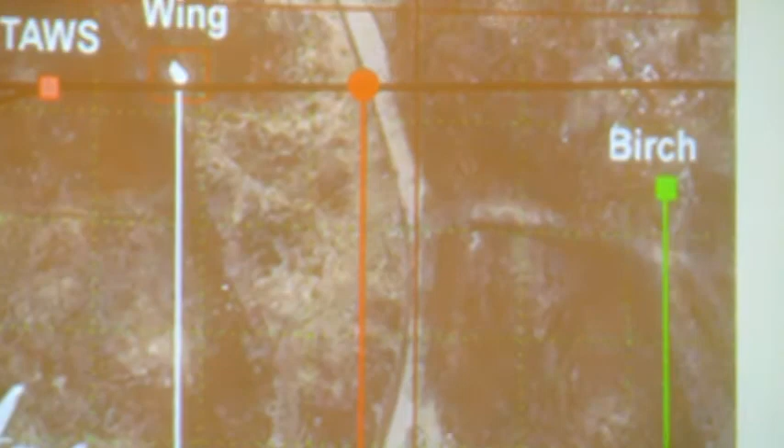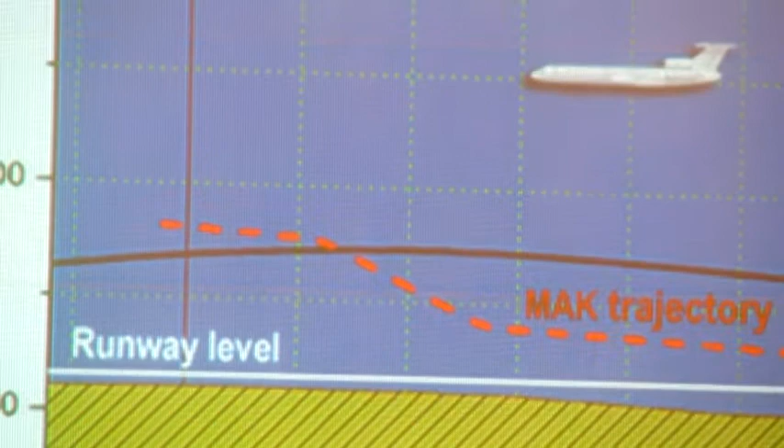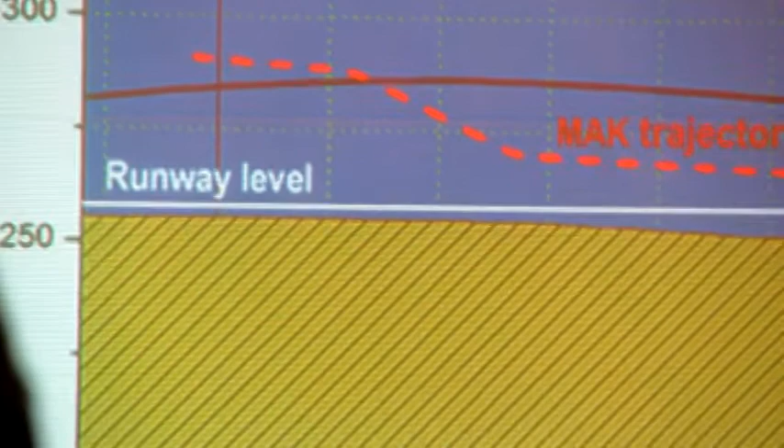According to the prediction of the investigating committee, the Russian investigating committee, the plane without a wing - you have to remember that they claim it lost one third of the wing at this point, so there was no wing on one side - was able to fly up, then a little bit horizontal, fly up again, and cross this black line, which was disregarded by this investigating committee for some reason.

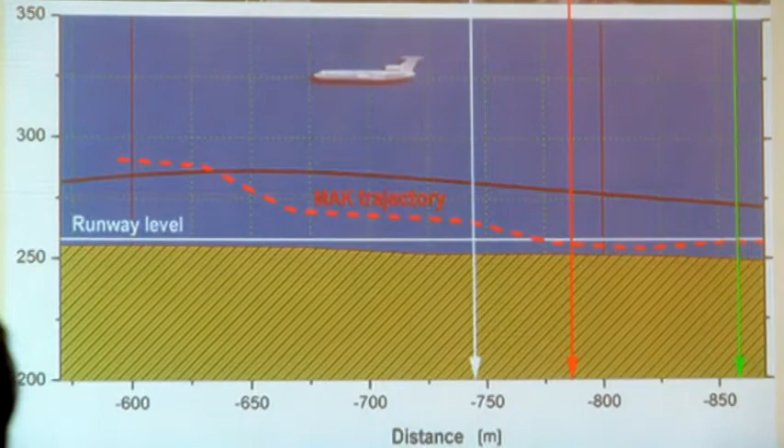That measured the real, in my opinion, elevation of this airplane. Now, this is the wing that was found 111 meters from the birch.

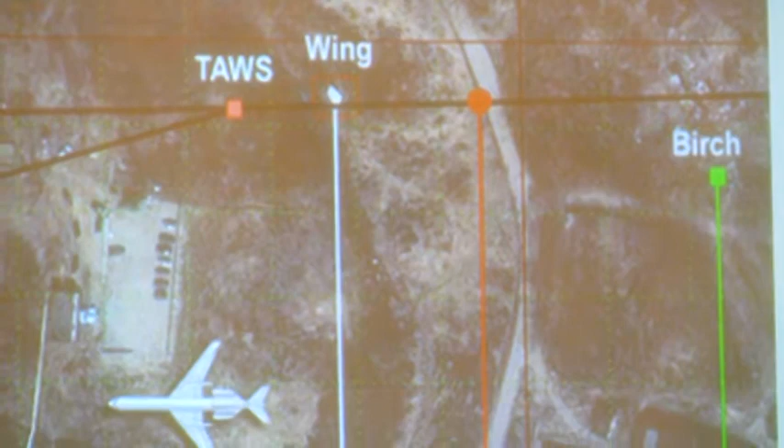So it means that - and you can see the green spot - in this area there's some forest, trees, and so this particular wing would have to fly through this forest, and somehow it didn't leave any marks. That again, in my opinion, made this assumption, this conclusion of the Russian investigating committee, not correct.

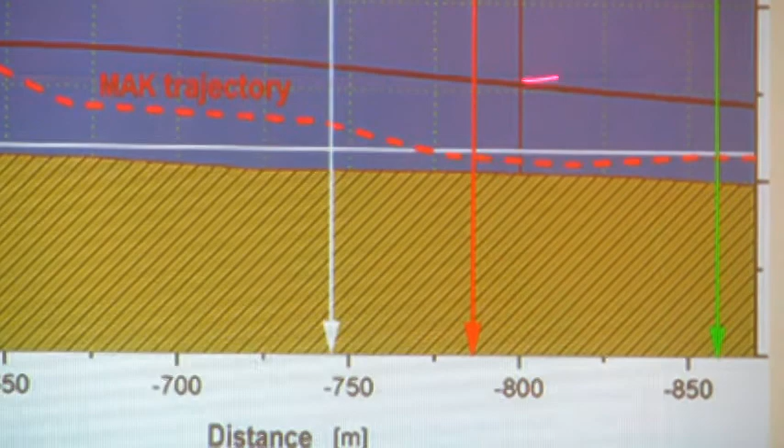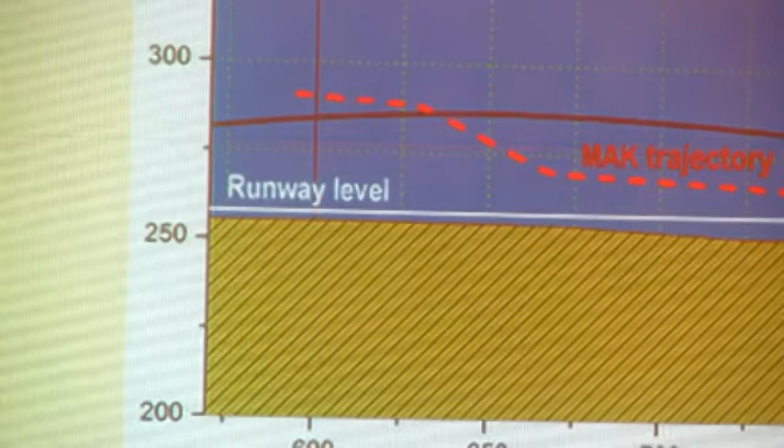In fact, the independent evaluation of the black boxes produced this curve, which means that the plane never hit the birch and flew over, but something happened in this area which drastically changed the orientation of the plane, and that was attributed by one of the experts from Australia to an explosion of the airplane, basically, in this location.

But my work was focused on simulation of the crash of the plane to the birch, because at that time I didn't know that other possibilities also exist. So I built the airplane model - well, I say I built it, but of course my graduate students did it.

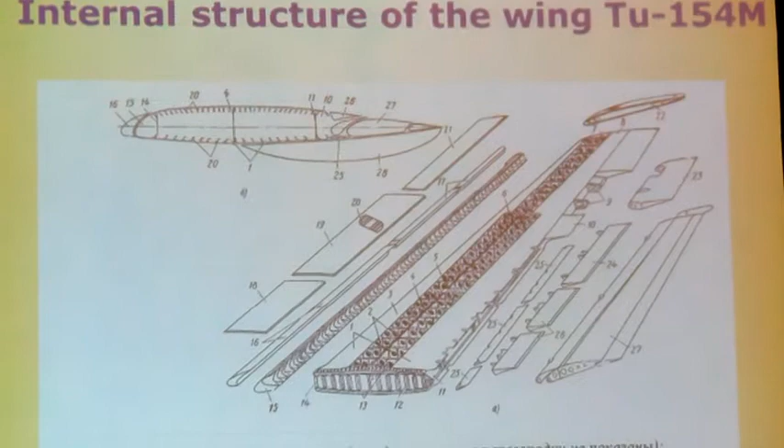With all utmost care to build the wing properly. Now, at the same time, we didn't want to make the wing too strong. So basically our wing is based on skin, the longitudinal beams, and those horizontal parts.

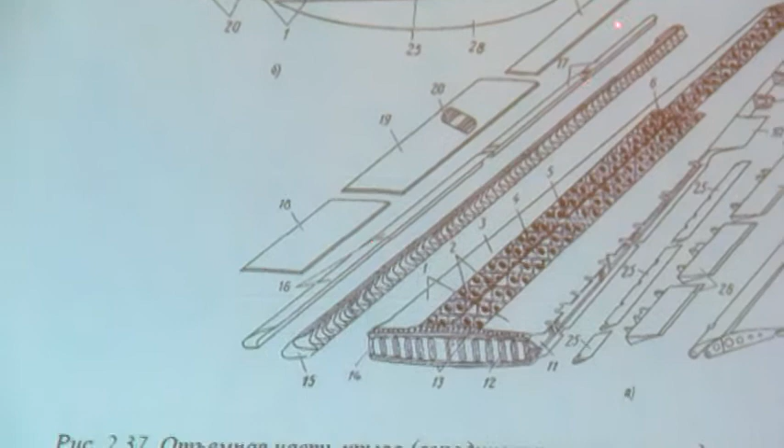At the same time, since the report said that the tree was between 30 to 40 centimeters, we used 44 centimeters to make it bigger by 10%, to be on the safe side in our simulations.

The material parameters for the trees is, of course, orthotropic - cylindrically orthotropic material. The properties can be taken from the literature. Aluminum is taken from the Russian side for this Russian airplane, and these are the LS-Dyna material models - plastic kinematic for the aluminum, and elastic orthotropic for the birch.

This is how the internal structure of the wing looks like. To validate our model, we use some of the tests that were done by other colleagues, and this is, for example, validation of the

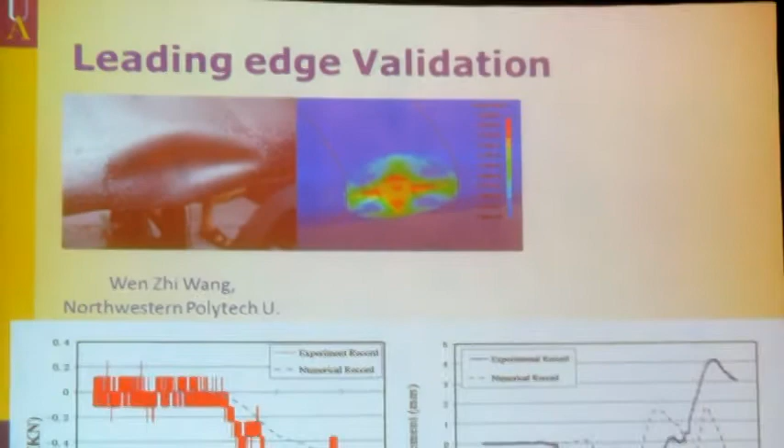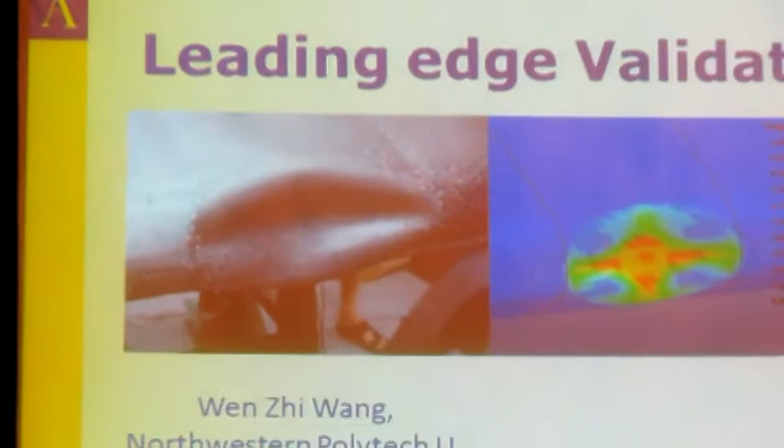wing front with the gelatin shot into the model of this wing. So you can see a deformation on the left and our prediction on the right, and below you can see the load and displacement as a function of time.

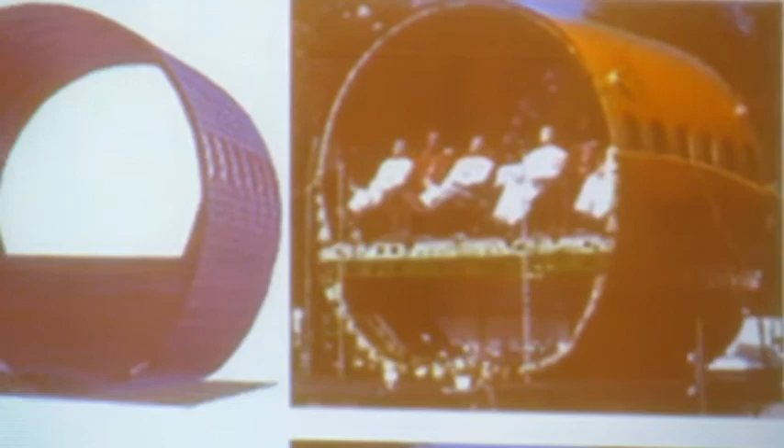The fuselage validation was done using the published model from a published test done at NASA Langley - this drop test - and they also used a simulation, I think, with LS-DYNA. So we kind of recalculated or reproduced the results using our model, and again, the validation was satisfactory.

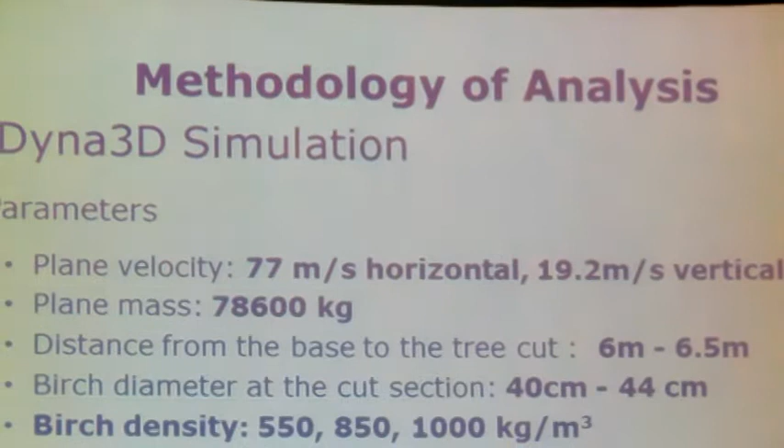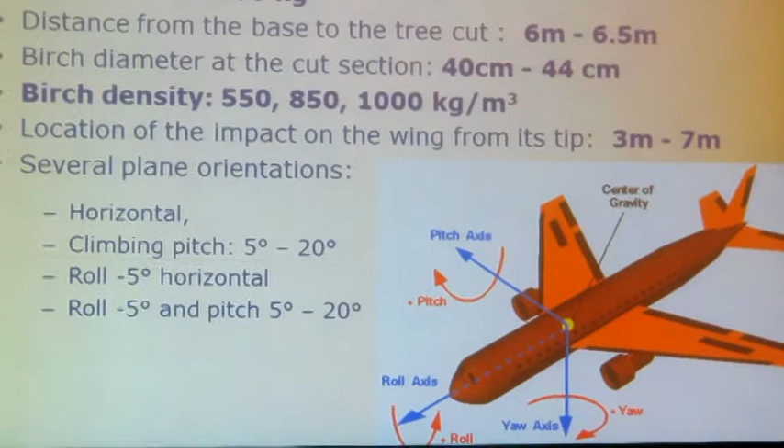Now, to make sure that we cover all the bases, we use parametric studies for simulations. We use different velocities within the framework of the official report, which is the maximum, and the velocity of this plane was about 80 meters per second.

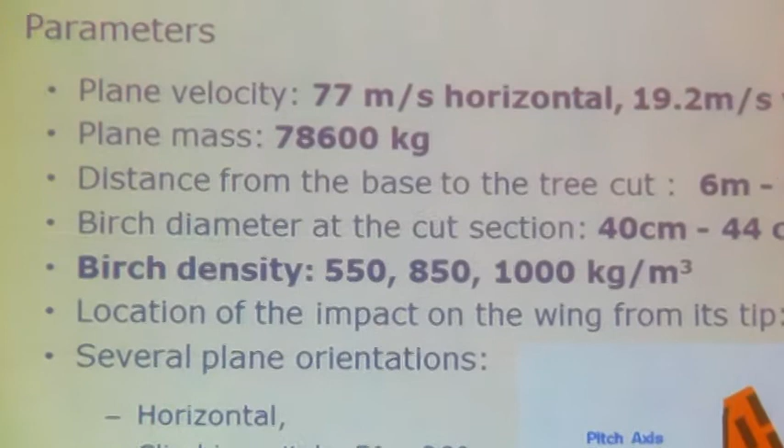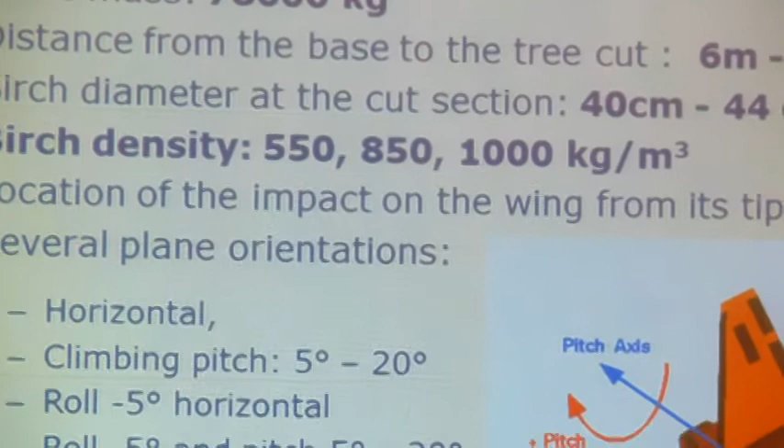So we used, for example, one of the cases was 77 horizontal and 19.2 vertical up. The mass is 78,600 kilograms with about 7 tons of fuel. You can see the other dimensions.

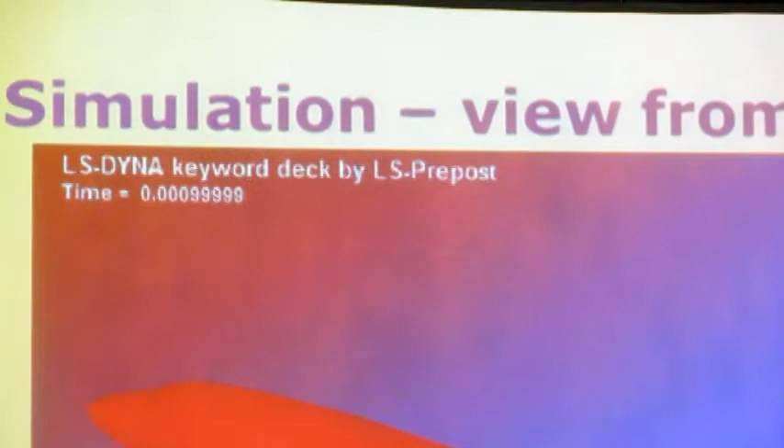The density of the birch was also increased to make sure that we make it stronger, basically, the birch for our simulation. And these are the simulations. So the yellow is the birch.

Of course, we don't have trees, we just use the trunk. And the airplane, from that distance, is a huge airplane. The wingspan is almost 50 meters, more than 50 meters long, capable of flying with 100 people inside.

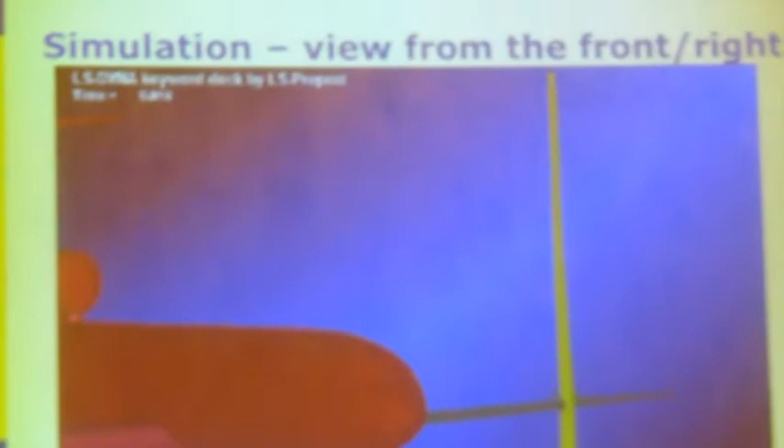So those simulations show basically there's damage. You can see some flying material, flying aluminum from the front edge.

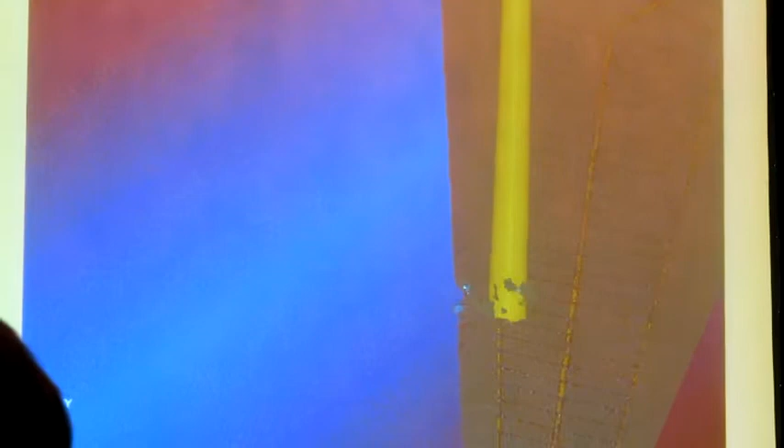Close up, you can see within the time is on the left corner here in seconds. So in times 0.02, the birch is basically broken due to dynamic load exerted by the longitudinal front beam of the wing.

So I presented this work to a parliamentary committee in Poland, and recently, a couple of weeks ago, to a European Union parliamentary committee, as they were interested in those results due to the fact that 9 of the generals who died in this crash were NATO generals.

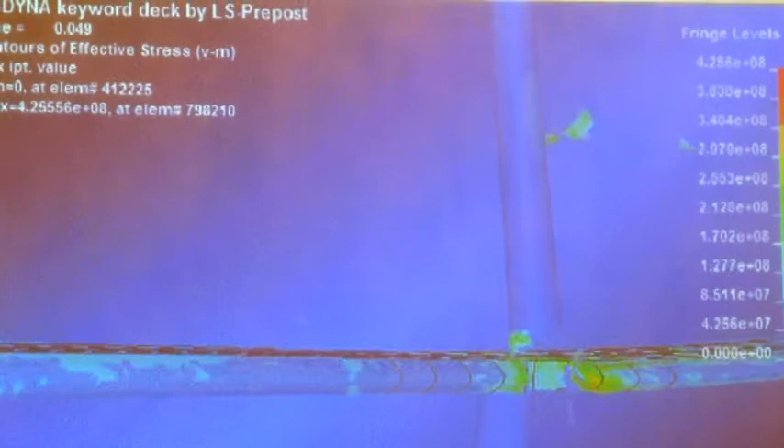They were very, very interesting to see a different take, let's say, on this explanation of this plane.

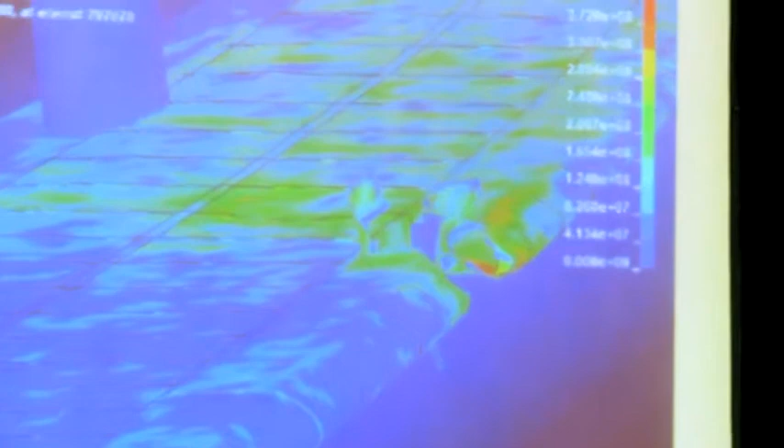So you can see here that, of course, once I have the model, I can see the stresses, vibrations, waves moving, and so on. But what is interesting is that in all cases the front part is damaged because this is very thin aluminum and leaves about 60 centimeters gap.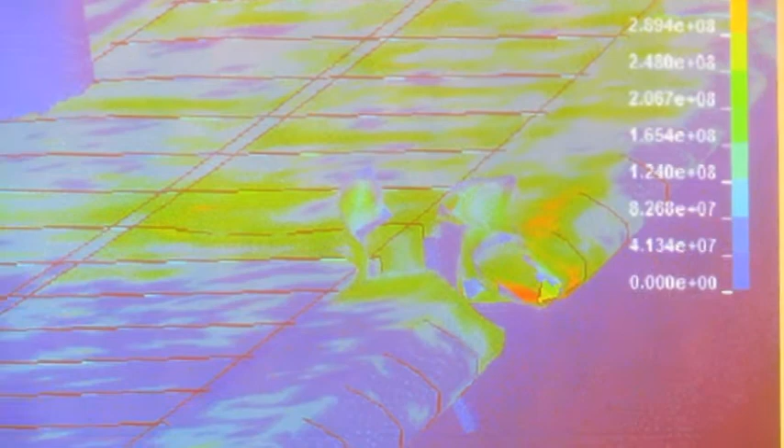And when we had the opportunity to look into the pictures of the debris left after the plane crashed, the whole edge, front edge, is intact. There is no such gap. So that was another surprise to me, that how they could claim that the birch was the cause, causing the separation of the wing if the front edge is not destroyed.

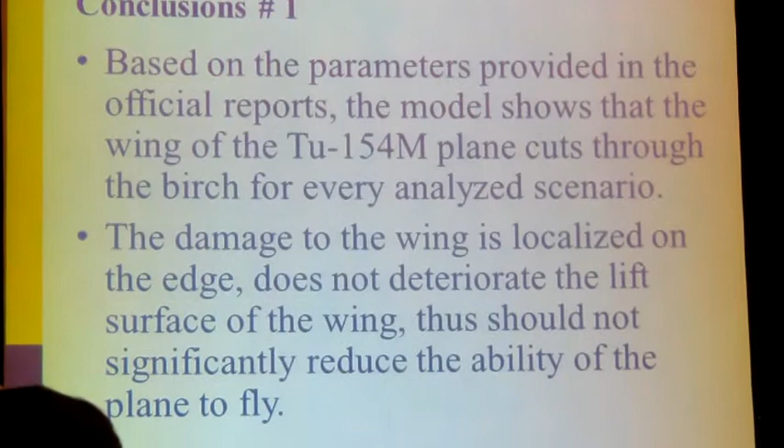So these were my conclusions, that in fact, based on the parameters provided in the official report, the model shows that the wing of this plane cuts through the birch for every analyzed scenario.

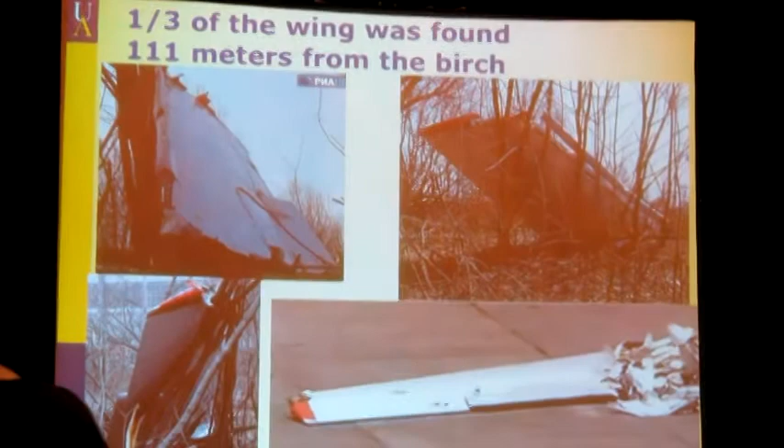Now, because the wing was found 111 meters in front, together with another professor, Professor Brown, who is an expert in aerodynamics, we tried to model the flight of this freely separated wing to see how it's supposed to fly. So again, you can see the picture from the satellite.

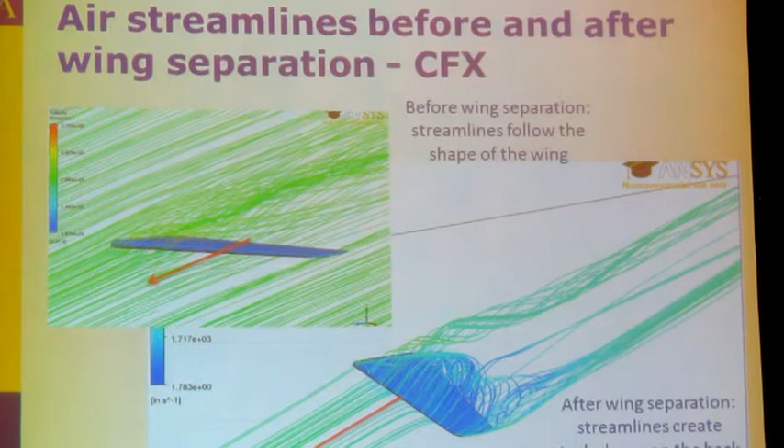This is the tree. This is the location of the wing, and using CFX, ANSYS CFX analysis and LS-DYNA, we found first the flow of the stream of air around the wing, this is just before it is separated from the invisible airplane, and this is after it is separated.

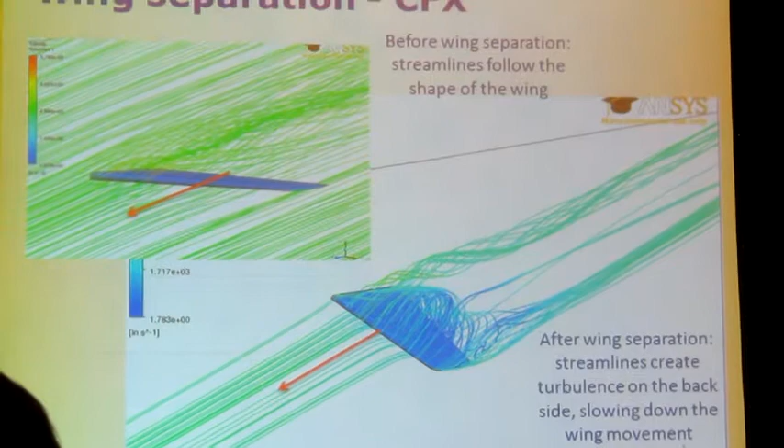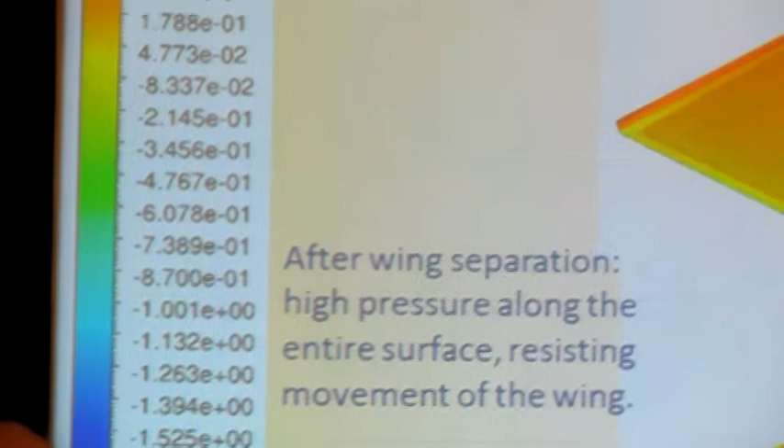So you can see the generation of turbulence on the back side of the wing, as anybody studying aerodynamics would expect. Same thing with the dynamic pressure. If the plane is flying in the right way, the dynamic pressure is highest on the front edge. The other pressures produce the lift of the airplane, and the moment you separate the wing, the forces will rotate the position of the wing, and therefore the pressure distributes over the front side of the wing, creating a strong force, and pressure times area is basically the drag force.

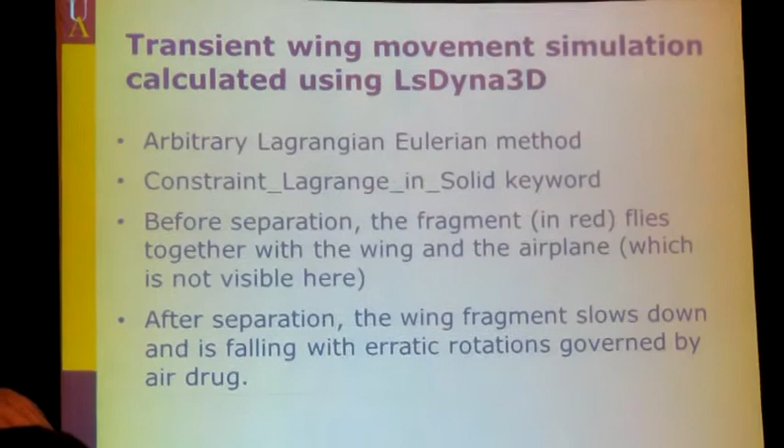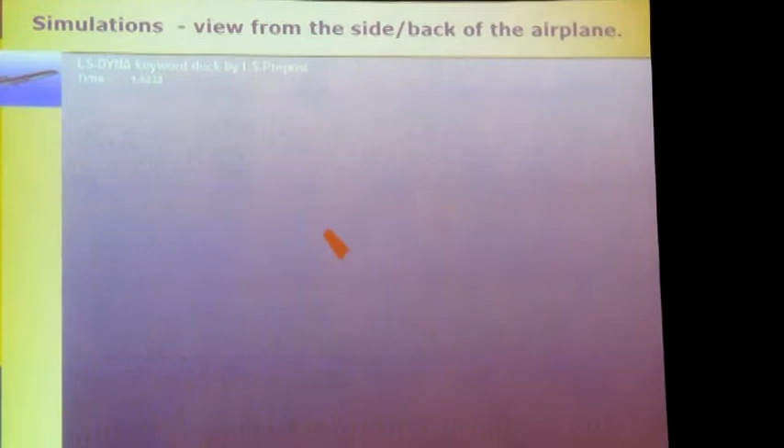So in LS-DYNA we used the arbitrary Lagrangian Eulerian method, Constraint_Lagrange_in_Solid keyword, and we simulated this in invisible air, and at this moment it is separated. So for the first second the wing is flying together with the invisible airplane, and then it's left to behave as physics or numerical simulations would show.

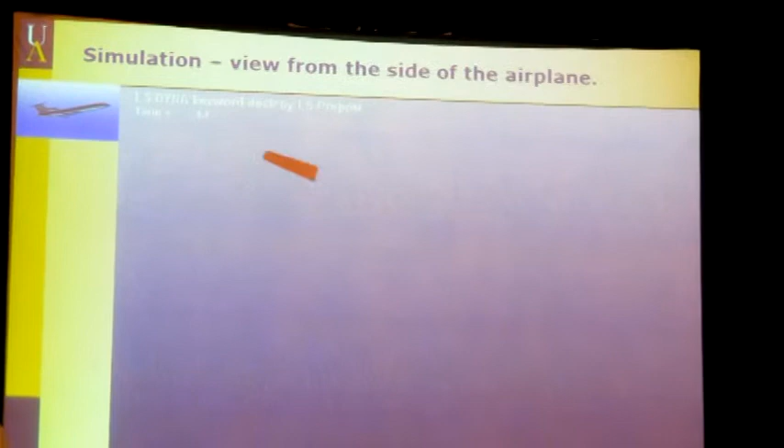Now we are flying from behind, and now it's separated, so you can see it's a kind of chaotic movement, flying like a leaf almost, of course the speed is much higher. And again from the side, now it's separated, and it's kind of whatever the pressure and the position of the wing would allow this to do.

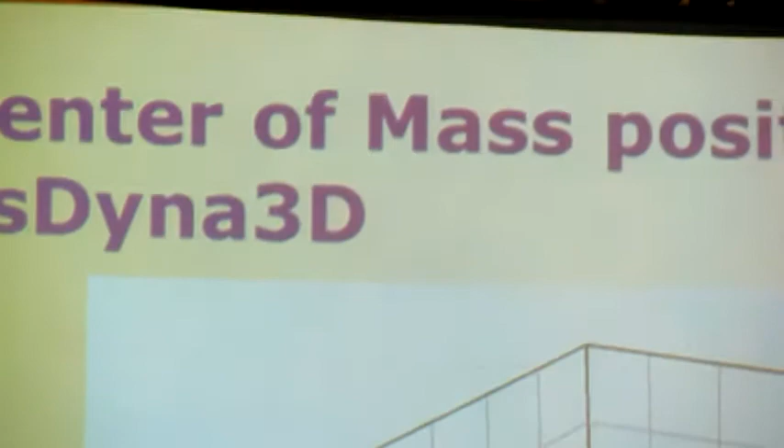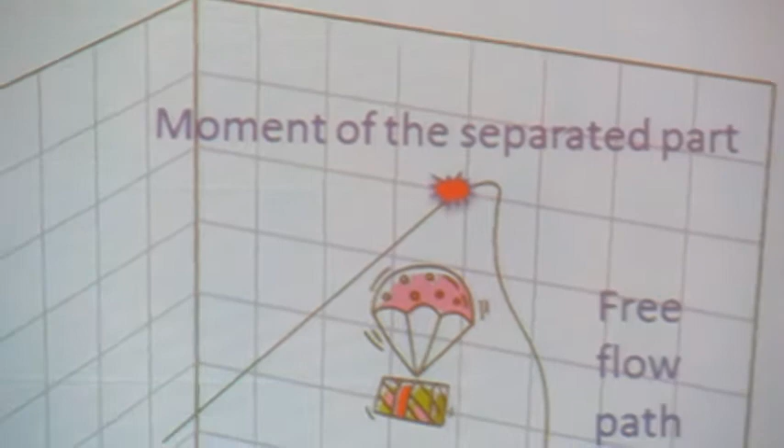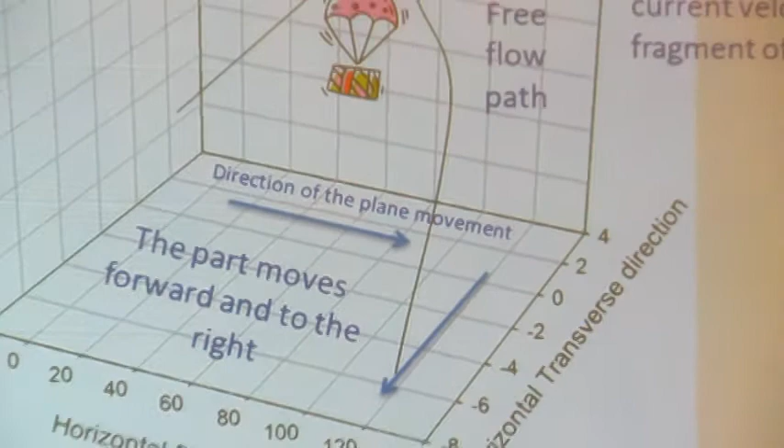So if we put the movement of the center of mass of this wing piece in three-dimensional space, we can see that at the moment of separation, the part has the tendency to move in the direction of the airplane, but also to the right side of the airplane, which is good because this is exactly how it was found in that area.

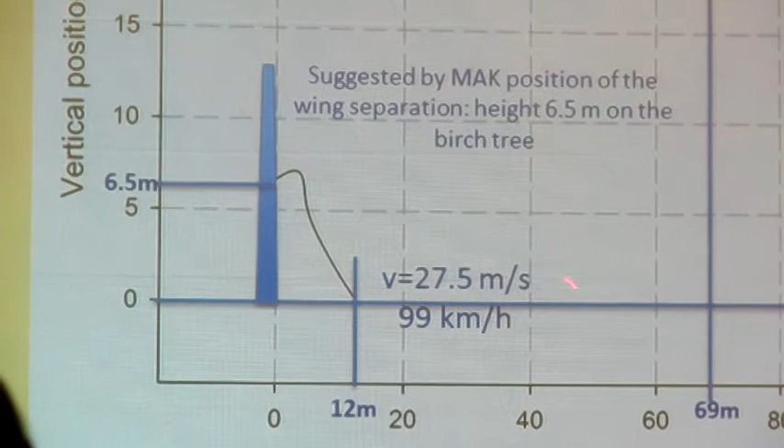However, if we connect this curve to the location of the birch at 6.5 meters high, this curve would predict that the wing would hit the ground about 12 meters away with a velocity of 100 kilometers per hour, not 111 meters as it was found.

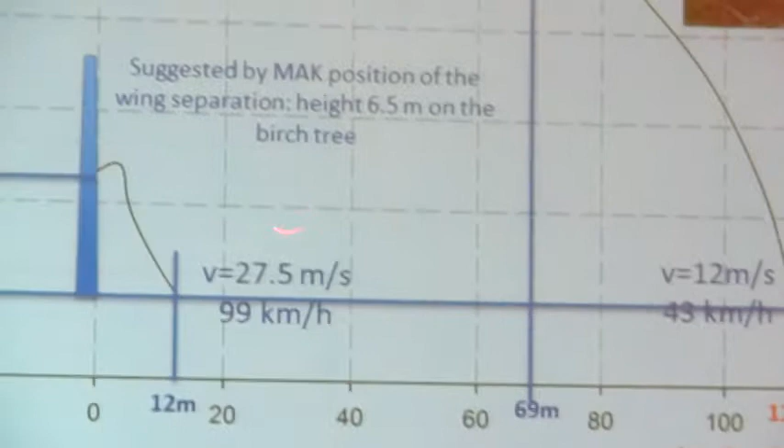We remember that between that part and somewhere here, there are some other trees. So there's no ability for the wing to go up and skip those trees. It has the tendency rather to go down.

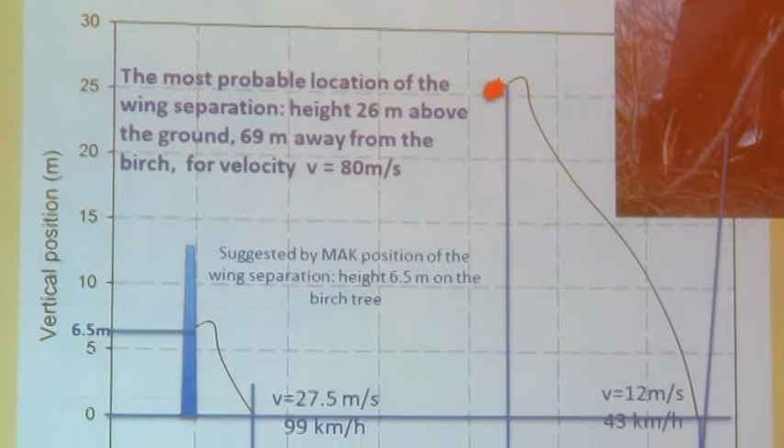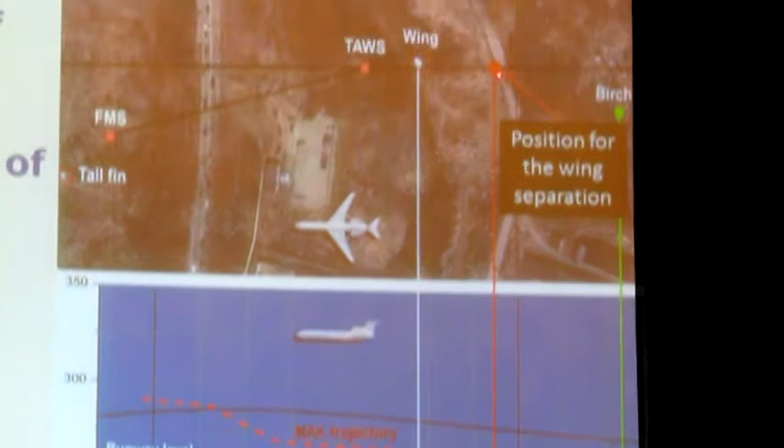So my prediction of the separation is this point, at 26 meters above the ground, because if it is anything below, it will have no space to move to the right side. You need to give that space for the aerodynamics to allow movement of the wing. So eventually it will move a little bit to the right, and it needs to move 10 meters.

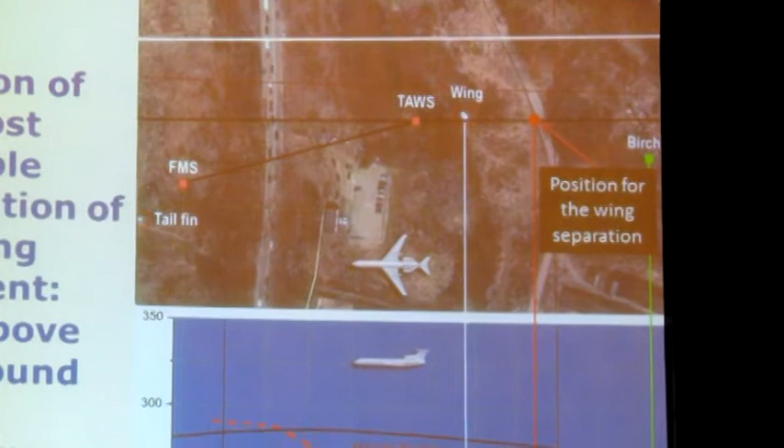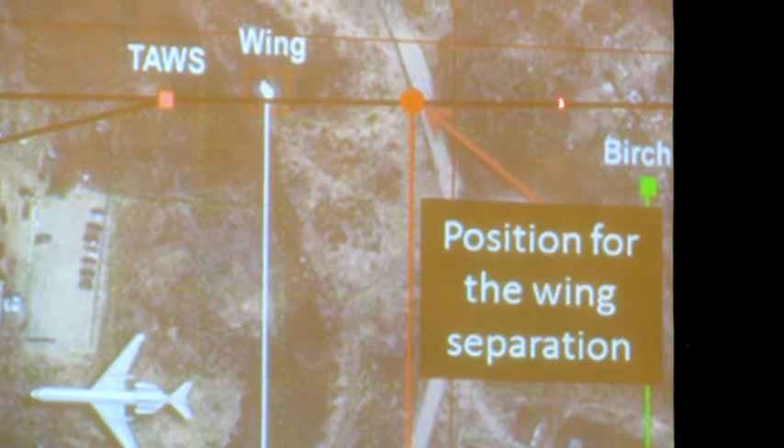Now, if it was separated exactly in this location—again, this is the path of the airplane—the wing was somewhere here, and you can see there are no trees. So this part can fly and stop on the wall of trees, which also makes sense.

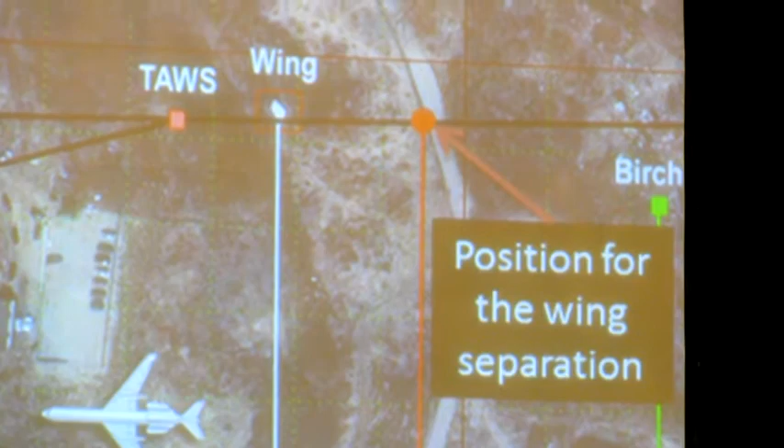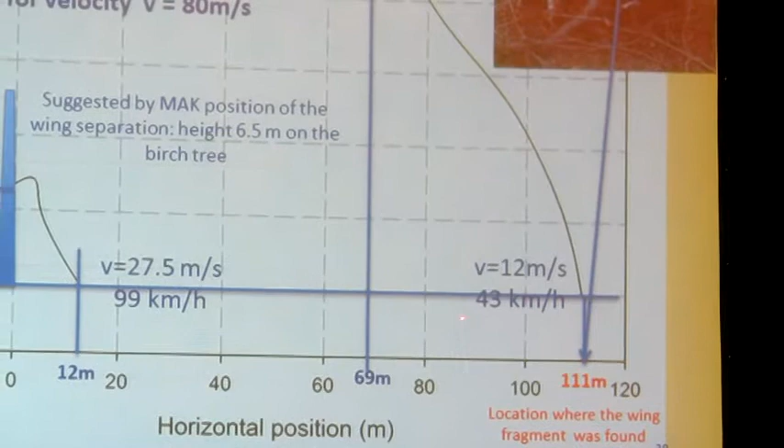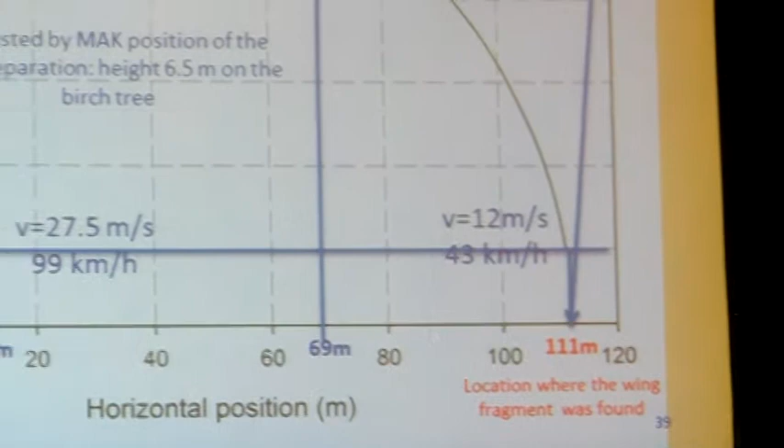At the same time, if it was separated at this location, which is at 26 meters and about 70 meters away from the birch, based on this prediction it will hit the trees at a velocity of about 40 kilometers per hour. This is 600 kilograms of aluminum mass. If it hits a bunch of trees at about 40 kilometers per hour, they will break, and it is consistent—at least in my eyes—with that velocity, not 100 kilometers per hour.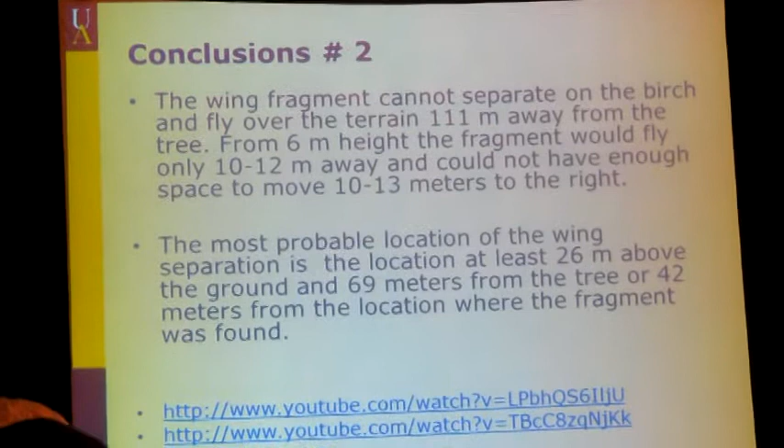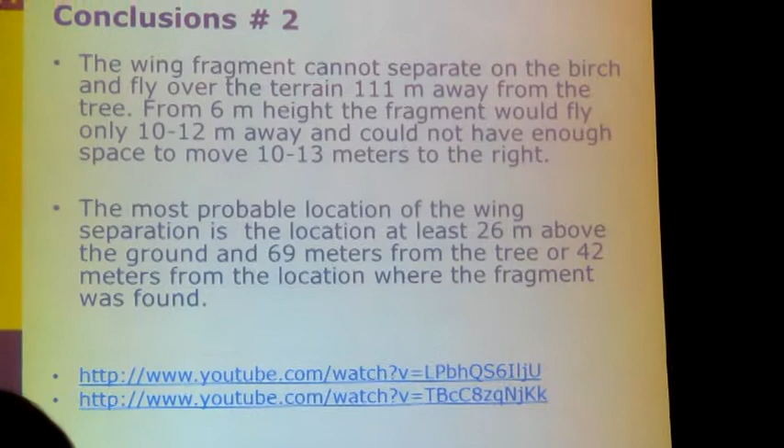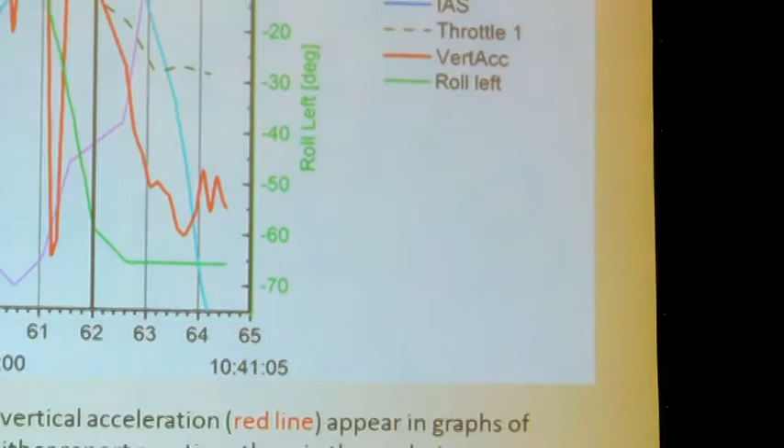So this is my other conclusion: my prediction shows that the separation happened about 70 meters away from the birch, 26 meters above, which is consistent with this black line, measured by TAWS and recorded in the black boxes, that was disregarded by the investigating committee. These are all the tests, all the measurements of the black boxes.

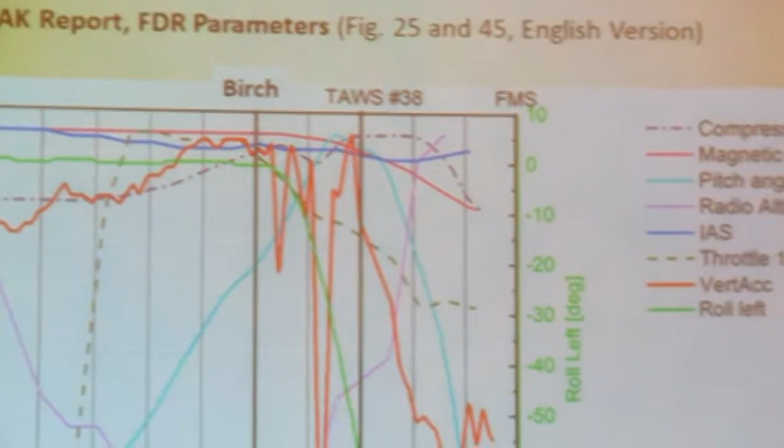So this is the location of the birch. What we found is that about the time where I predict the wing was supposed to separate, there are two sharp accelerations. Nobody knows what produced those accelerations, but definitely not the birch, because they occur later in time. They were not explained by the investigating committee.

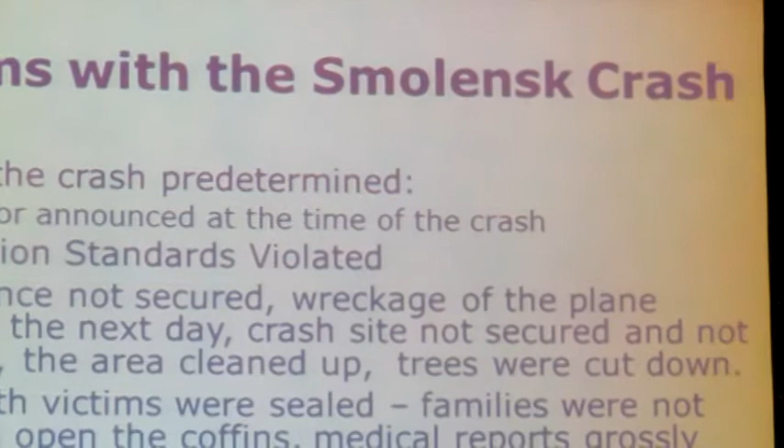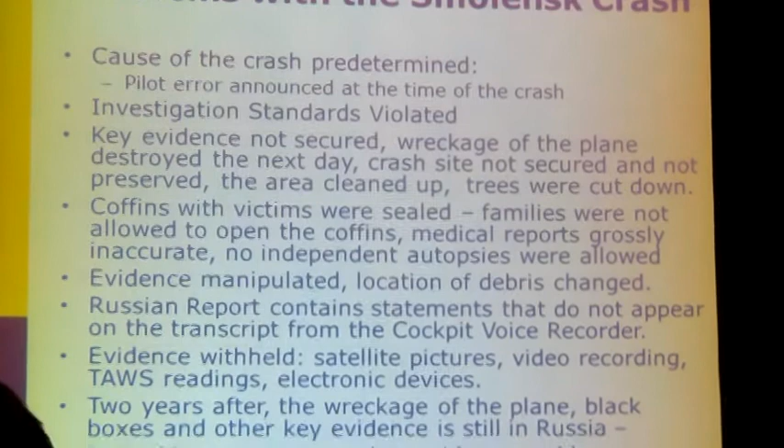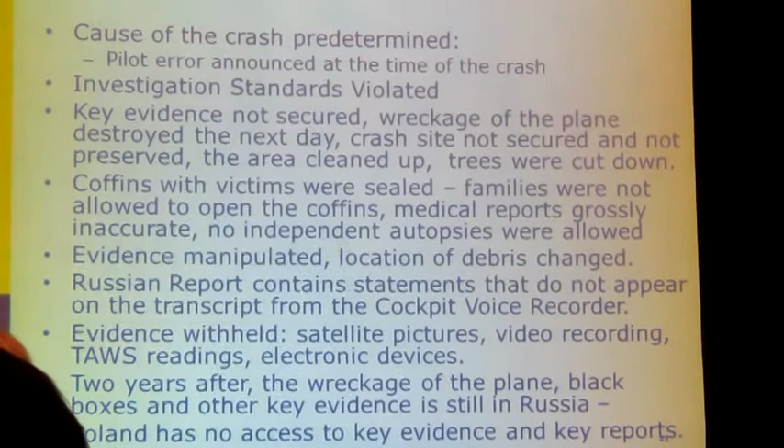There were, of course, other shortcomings of the investigation. One hour after the crash, it was announced that it was pilot error, and basically anything they looked for was to substantiate this announcement, while anything that did not substantiate it was disregarded. So investigation standards were violated, as I understand from ICAO requirements.

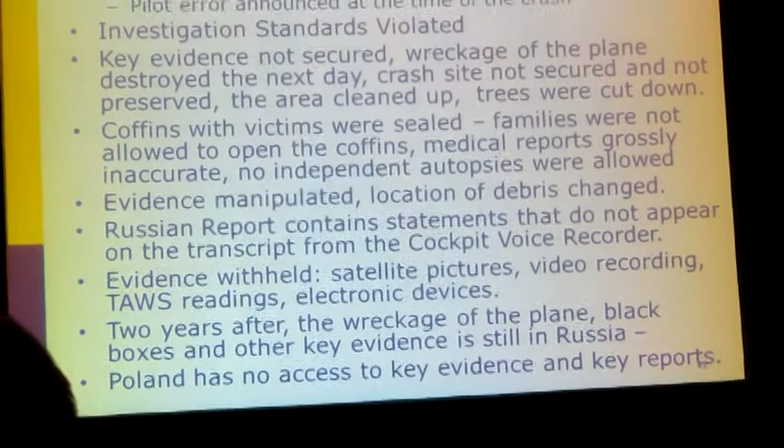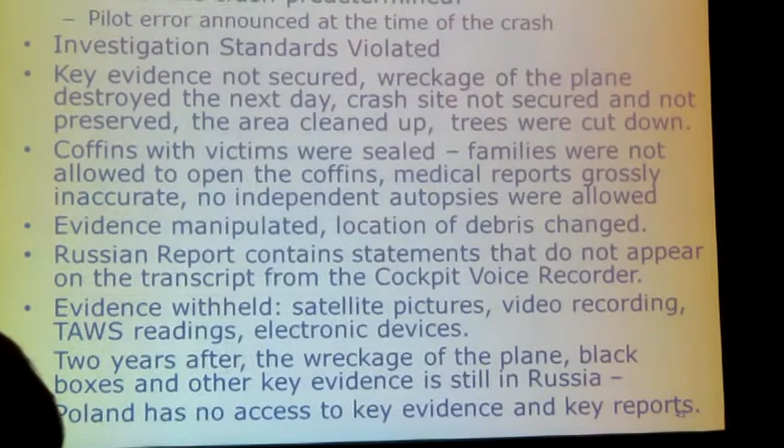Key evidence not secured: the wreckage of the plane was destroyed the next day, the crash site was not secured or preserved, the area was cleaned up, trees were cut down, even grass was burned a few days later. Coffins with victims were sent to Poland, sealed, and for 2 years now nobody has the right to open those coffins.

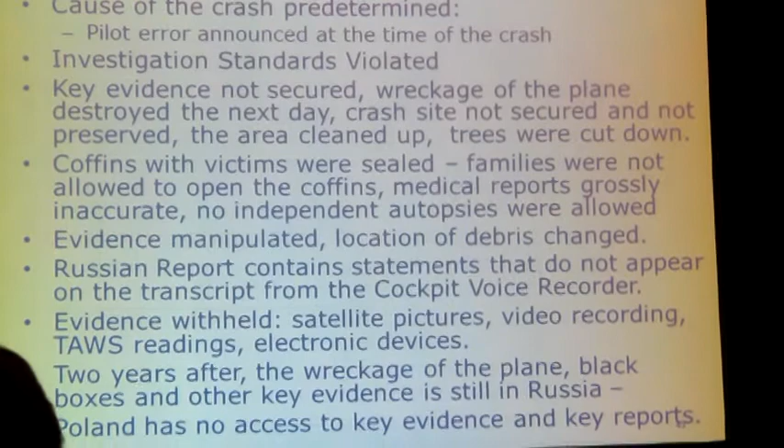When one of the American experts, Dr. Baden, who performed the autopsy for President Kennedy, went at the request of families to secure an autopsy for their loved one, the Polish government would not allow him in, even to make observations of the autopsy.

So evidence was manipulated, and the location of debris changed. We have evidence like satellite pictures showing that some parts of the airplane were moved from one day to another, and in the report the second position is marked as the right one, not the first, from the previous day.

A Russian report contains statements that do not appear on the transcript from the cockpit voice recorder. Evidence was withheld: 2 years after the wreckage of the plane, black boxes and other key evidence are still in Russia, and no international expert is allowed to go there and touch it or see it firsthand.

So I will be happy to answer any questions. At the same time, I would like to show how the evidence was taken care of with this plane the two days after the crash. Thank you.